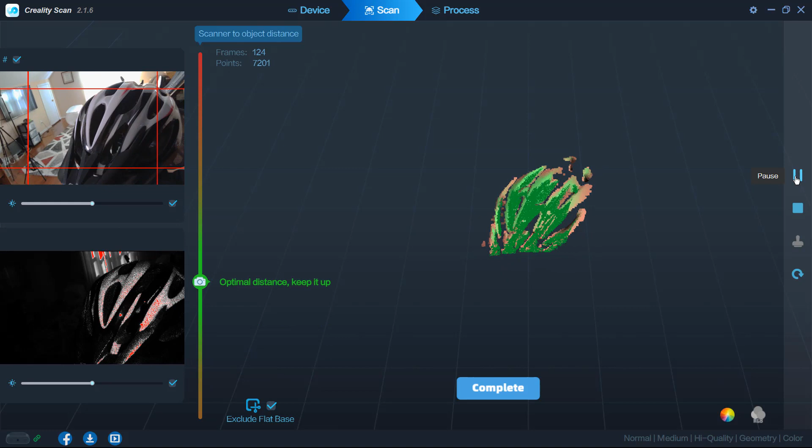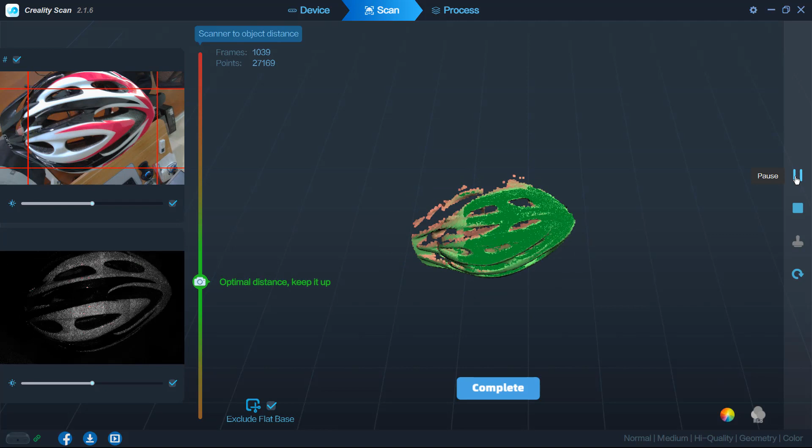There are two different versions of the Creality Scan Ferret: the Scan Ferret and the Pro. To the best of my knowledge, the only difference is the Wi-Fi 6 wireless bridge. I tested the wireless bridge paired to a smartphone. I was not able to get it to work paired to my laptop, and I think in theory the best use case for this is to pair it to your laptop, because that way you can go about scanning without being tethered to a computer.

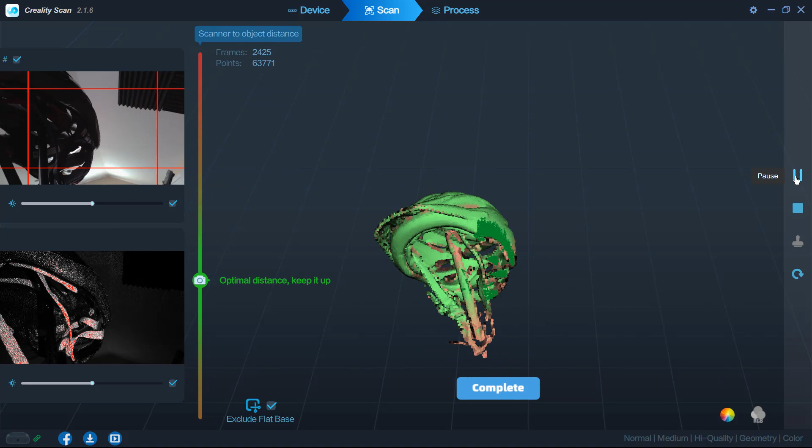Obviously you will have to work within the confines of the battery that comes with it. For this first example, I scanned a bicycle helmet, and I did this in 3 different scans: tethered to my PC, tethered to my laptop, and then using the Wi-Fi bridge to my smartphone. So this was a good test of how the scanner would work in all 3 scenarios.

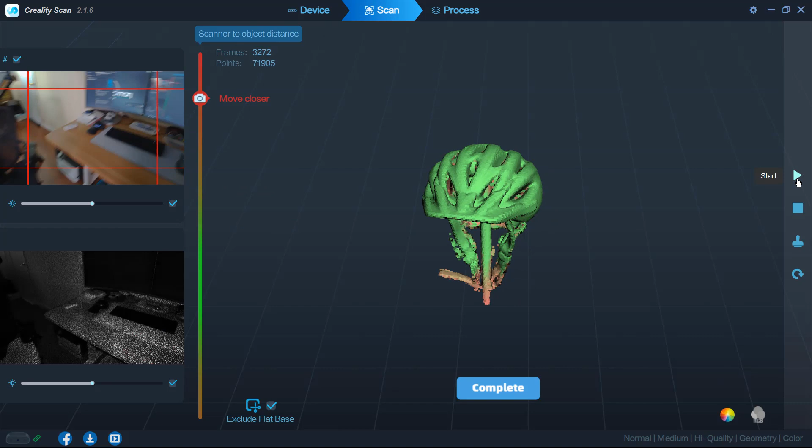The first thing I found is that the amount of time you spend hovering over an object will directly indicate how good the downstream mesh and points are going to be. You need to make sure that everything's a bright green color when you're scanning.

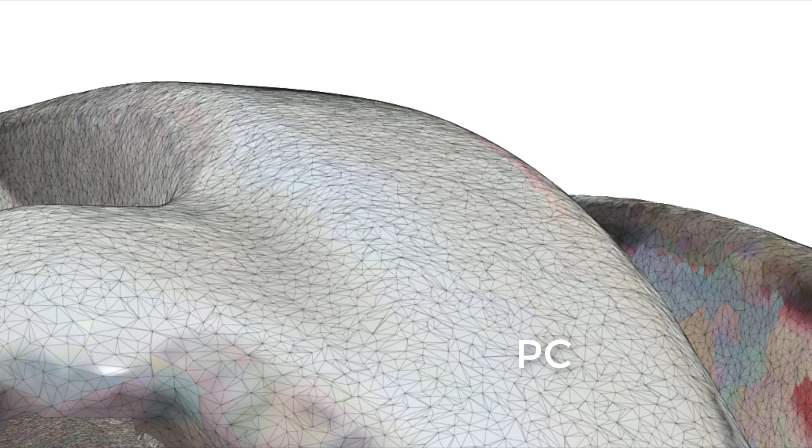I did not really notice a performance difference between the PC and the laptop. I took about 5 minutes to scan in both instances, including the one-click process. With the smartphone, the end result actually is the same, and interestingly enough, I ended up capturing more frames on the phone in the same amount of time. However, the processing time took longer to do on the phone. Again, it was still the one-click process.

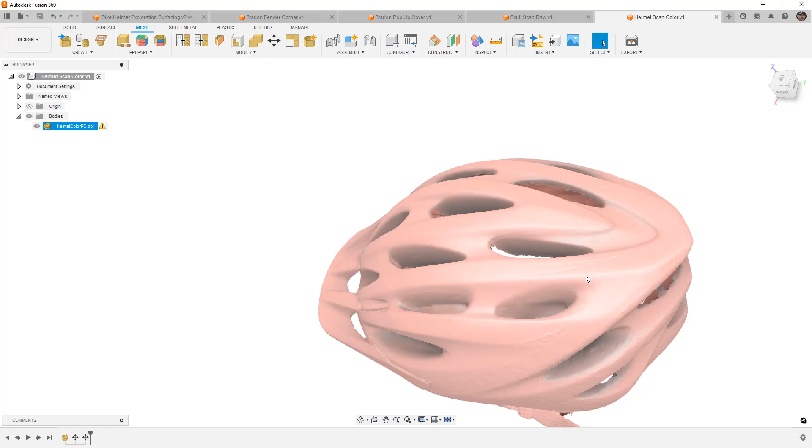I didn't toggle or tweak any of the options or settings. I just used whatever it had as a preset, scanned it with color, and I did notice again it took longer for the optimization and the processing. I'm using a Samsung Galaxy S23, a fairly recent phone, and I did notice it got warm during that process. The scan was fine, but processing it did tax the phone a little bit.

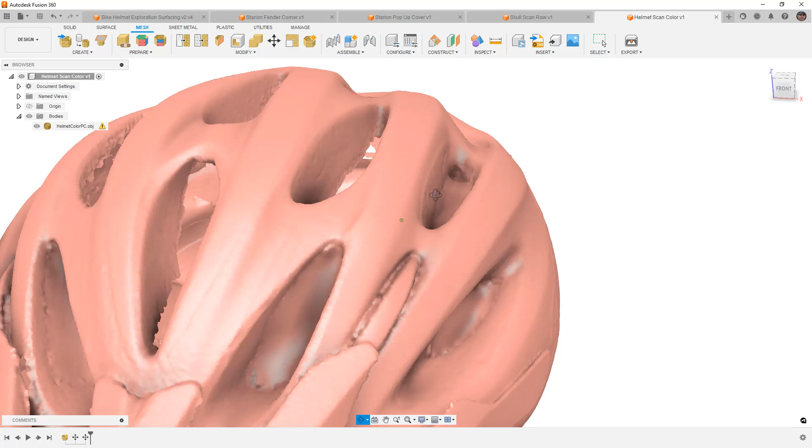I think the benefit here is the wireless bridge. If it can't be tethered to either your PC or your laptop, there's not really a good reason I can see to use it tethered to a smartphone, because you can plug directly into the phone. You're not really gaining anything in terms of performance using that option, to the best of my knowledge.

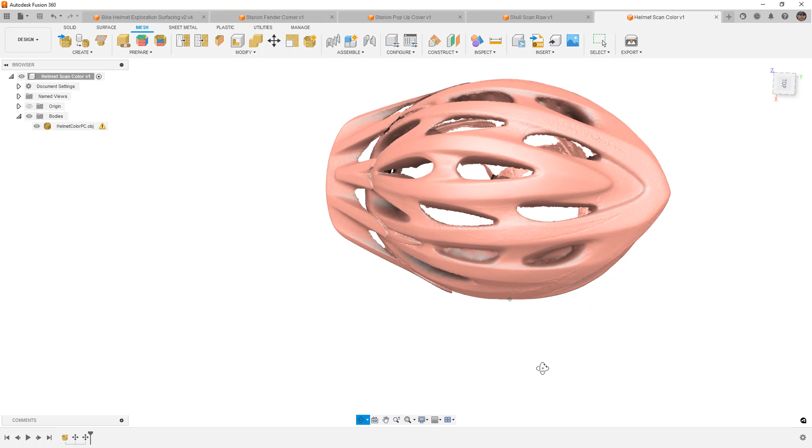What I noticed again is the tracking was fine. Scanning the shiny objects and the black objects, it actually did a really good job, but we can see there is a definite difference in the scan quality on the shiny white and red areas versus the shiny black areas. This does come in full color, so I can export this OBJ and bring it into Fusion 360 with the color, which I thought was a pretty nice addition. A lot of times as you get up in the scale of 3D scanners, the color options are add-ons, so the fact that these entry-level scanners can offer the 24-bit full color is a pretty nice feature.

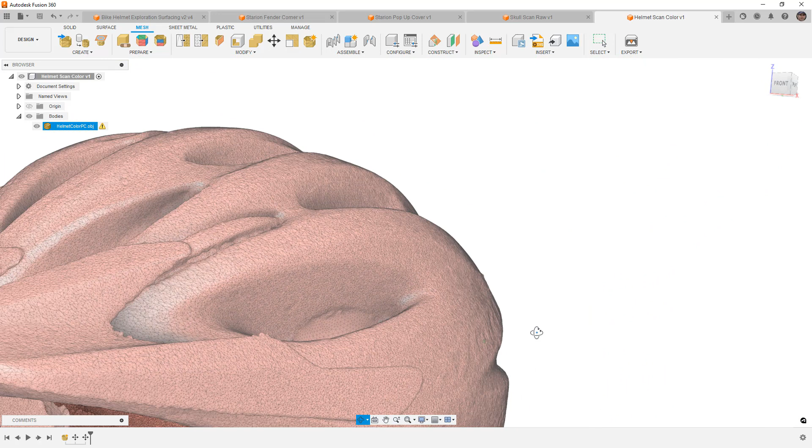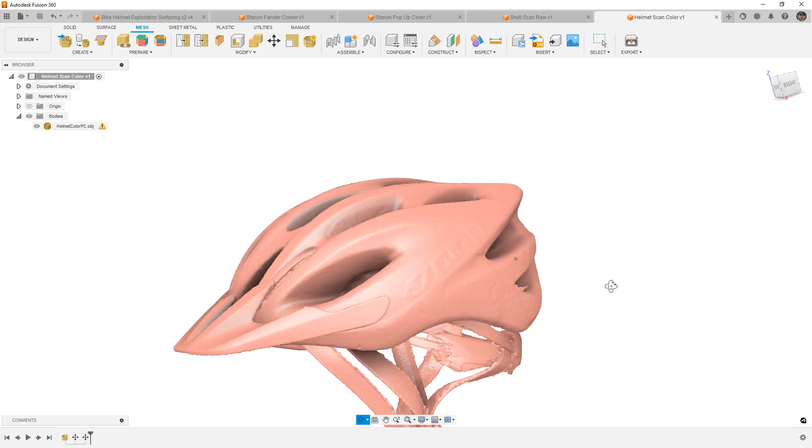When using the scanner, it's very important that the preview on the screen stays that bright green color. When I scanned this with my desktop and with the laptop, both took about 5 minutes to scan as well as process with the one-click option. I didn't go through any of the settings or toggles, I just used everything that Creality ships it with. I think this software and scanner are really meant for an entry-level person, designed to pair with their 3D printers. So if you're scanning something you're planning on 3D printing, I think this is a perfect companion.

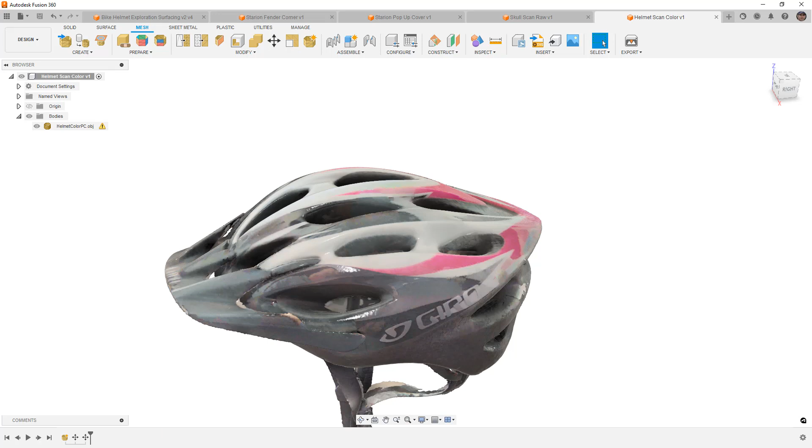Now, the quality of the mesh is better on those shiny white areas than it was on the shiny black areas, but overall I think it did a really good job of scanning the helmet. The next thing we're going to move into is car parts.

Now, this is probably what most of you are interested in on this channel, whether or not we can scan a car with it. First object I did was the pop-up headlight on my car. I used marker tracking, which is a new addition to the Creality Scan software, so keep in mind that it's just been added in the last release.

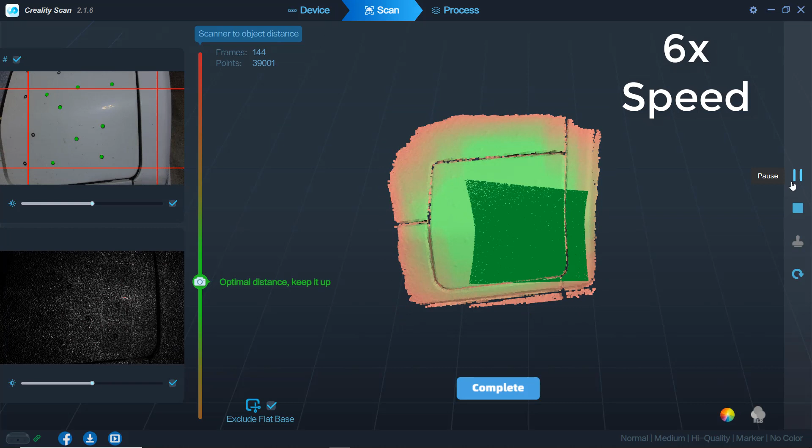What I will say is that this took a bit longer than I expected. This was tethered to a laptop, so I wasn't using a smartphone, and I found that I had to spend a good bit of time in order to get that bright green color on the preview. The areas in the corners where I don't have the bright green, as we begin to process the points in the mesh, start to lose out on that data.

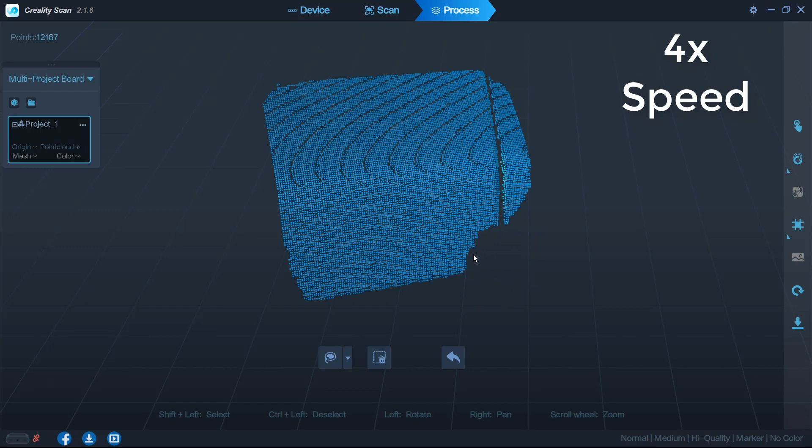So I will say that the output had a bunch of bumps where the markers were, and I didn't see any automated option for removing those. You can go through the process manually. Once you mesh it, you can remove those and patch it, but I actually found that the quality of the patch was a bit better filling those holes in Fusion 360, so I simply exported it with all the bumps.

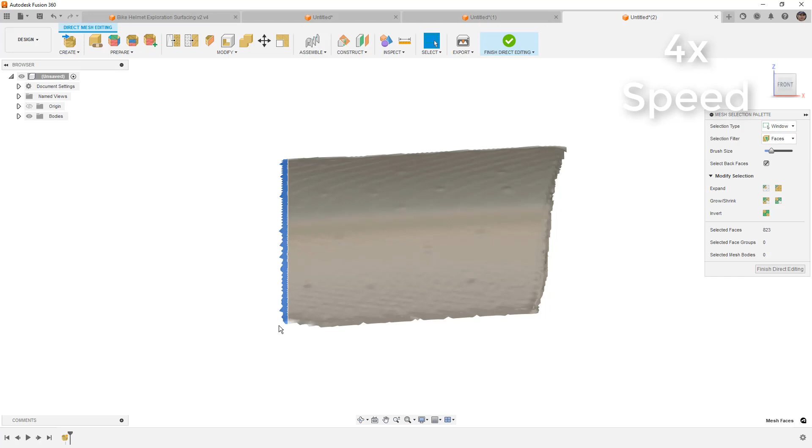When we get to Fusion, I do a little bit of processing by using a remesh and also using the smoothing, and this was able to filter out those points, so I didn't have to worry too much about doing a lot of extra work.

The end result, the quality of the surface - and this was done in high quality mode, which there is also a fast scan mode - but the quality of the surface or the mesh that we got is actually pretty good, but the more we process it, the more we're going to start to lose some detail.

Which brings me to the next example, which was the front corner of the fender, so right near that same area of the pop-up headlight, and this had a bunch of harder edges on it, and I was really curious as to how this would work.

I did this by just using the feature or geometry tracking, no markers, and I did it relatively quickly. I didn't spend a bunch of time making sure that the surfaces were bright green in the preview, and we can see a very drastic difference in the quality of the scan.

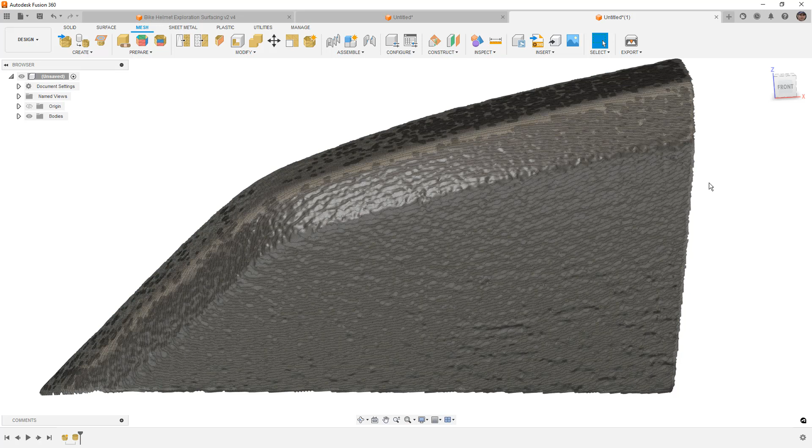Now, I think when I see comments about this, it's not a professional scanner - it's not, it's a consumer entry-level hobby scanner. But there is definitely a difference in quality when you spend more time scanning your objects versus when you just go through it fast.

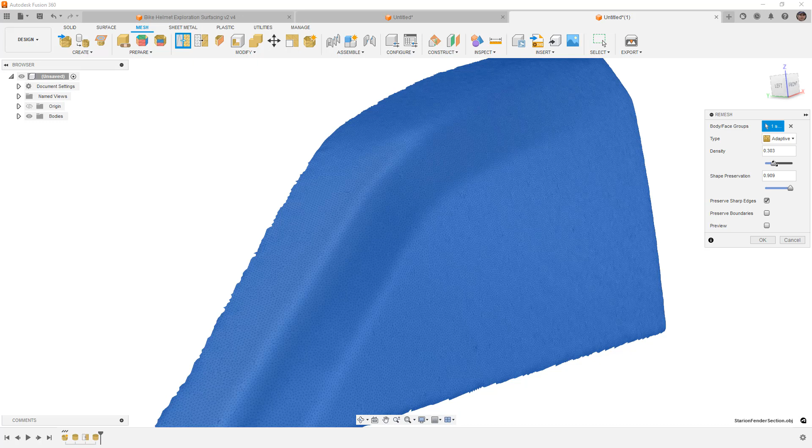Now, even though I went through this fast, I brought it into Fusion and I did some processing, and I was able to get what I think is a usable result. But again, the more you process and smooth, the more details you're going to end up losing, so there are going to be some diminishing returns to how much you can process this.

With something that is maybe a little bit smoother and doesn't have those hard edges, you can maybe get away with a little bit more processing. But with the same corner, if I'd spent more time scanning, I would have gotten a better result.

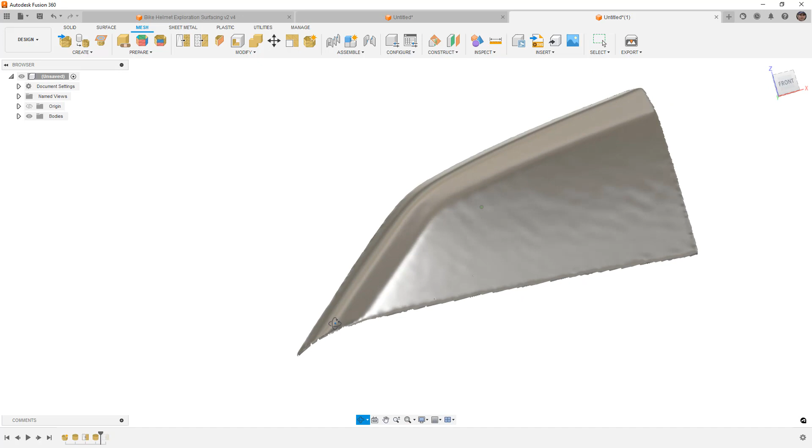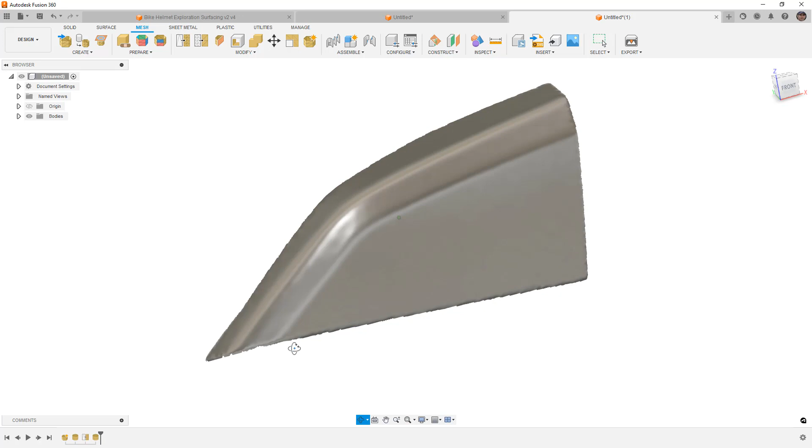So would I scan an entire car with this? I don't think so. I think that if you use the fast scan mode tethered to a laptop, it could be done, but the problem is its cable is fairly short, so you will have to constantly move the laptop around with you. Or if you use a smartphone, then you have a little bit more freedom to move around, but you are going to likely take a hit in the frames per second that you're capturing. So I think that this process to get good data of an entire car would just take way too long.

Is it possible? Yeah, sure. I think that you could do it, but would you want to? Probably not.

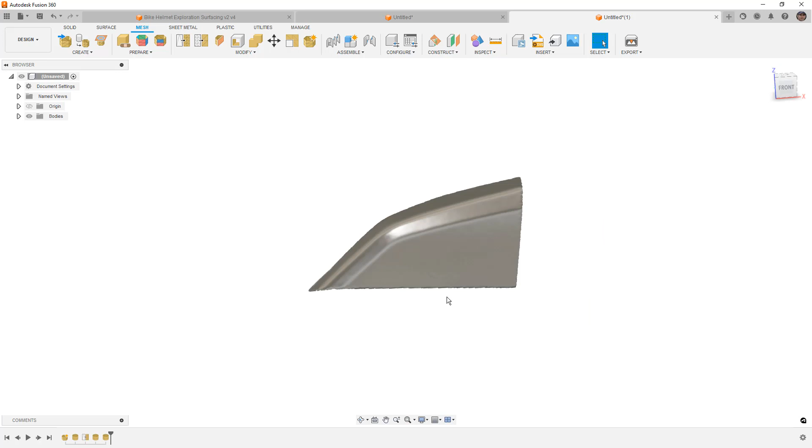Now, when we move into the next example, one of the things that I see on the Creality Store website is scanning an entire motorcycle. Now, I was skeptical as to whether or not this was possible or feasible, so I tried it on one of my bikes - this is an old GPZ 750 project bike that I've had for 20 plus years.

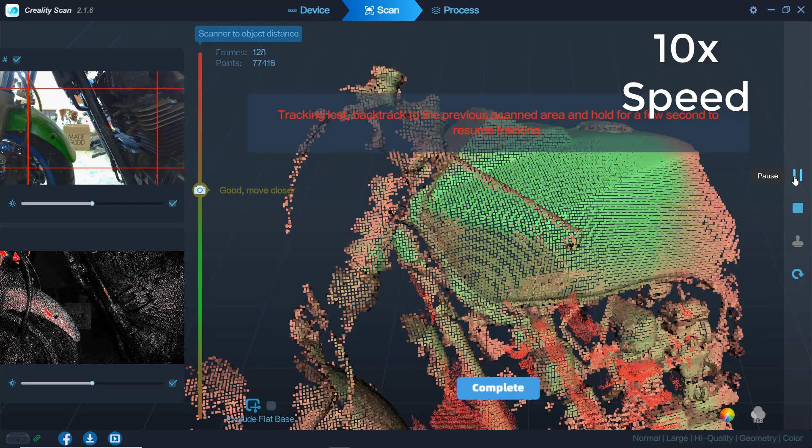Now, I went into it - this is a single scan. I spent the most amount of time on the gas tank. The tail section is raw sheet metal, something that I was building. And then I quickly went over the engine and some other areas, moving out to see where the tires were and the wheels and the swing arm and all that sort of stuff. Now, I will say that the amount of time that I spent scanning the tank, the results are pretty good.

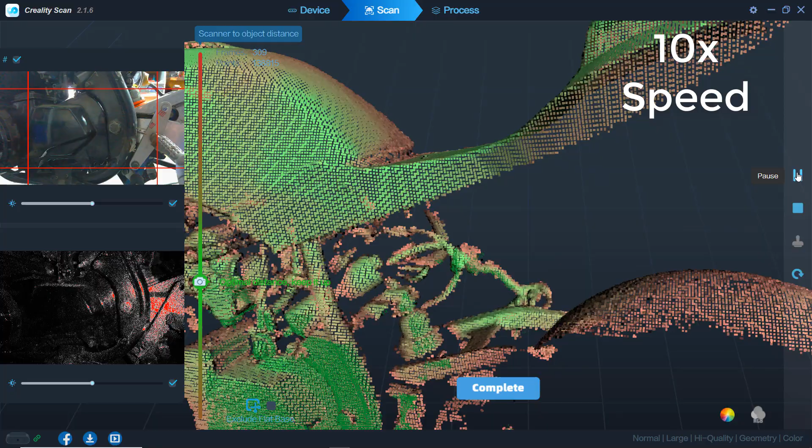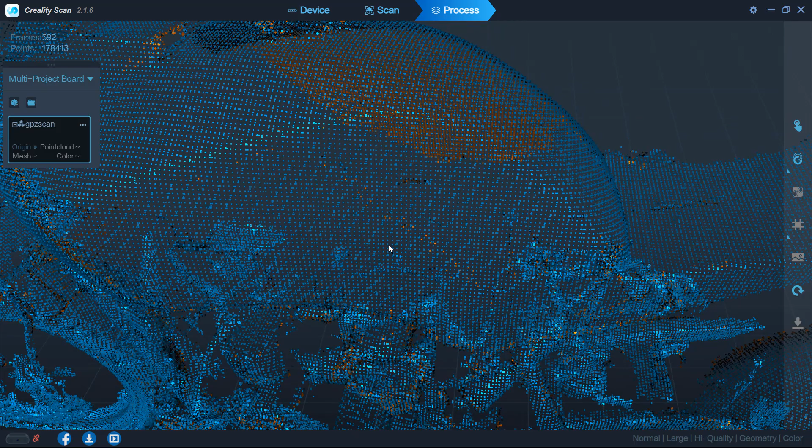I think that I could use that to design some parts off of. However, the rest of it, because I didn't spend the amount of time to hover over all of those fine details, it just ends up being junk in the scan. So as soon as you start optimizing and trying to build a mesh out of this, you'll start to see that those areas get really rough. That's kind of what you have to expect.

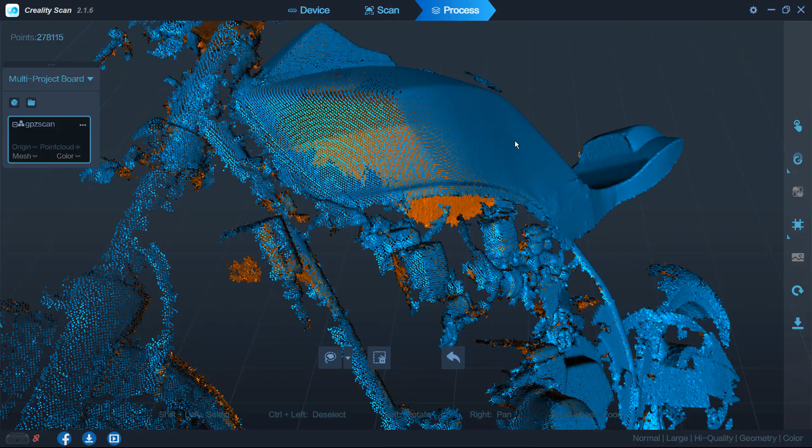The scanner itself can do this, and I think that if you took the time, you would be able to get something usable out of it. But I think that the amount of time it would take to scan an entire motorcycle would just be unrealistic. Not to say that you can't do it again, but I think that it's probably not a realistic ask to be able to do that.

I will say that the tracking did work pretty well, and it was really good at picking up the dark black areas and the shiny areas. That was really surprising to me that it did so well with those areas. So I think that if you really wanted to get a high resolution scan of, say, the engine, if it's shiny black, I think you could do it if you were patient enough and you spent enough time in those areas.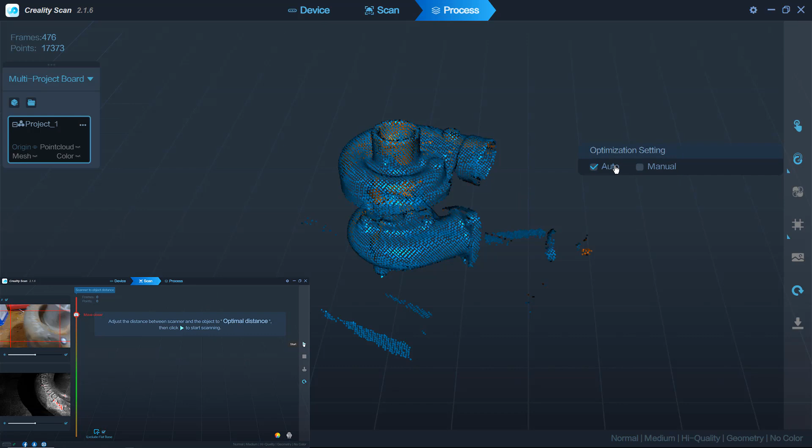Moving on to the next example is a small turbo that's also from this GPZ project. Now, I spent probably the most amount of time scanning this out of anything else that I scanned. I spent a lot of time moving the scanner around, trying to ensure that the compressor housing was that bright green color. And this doesn't have any prep on it. There's a little bit of dirt in some of the areas because this actually came off of a diesel Bobcat.

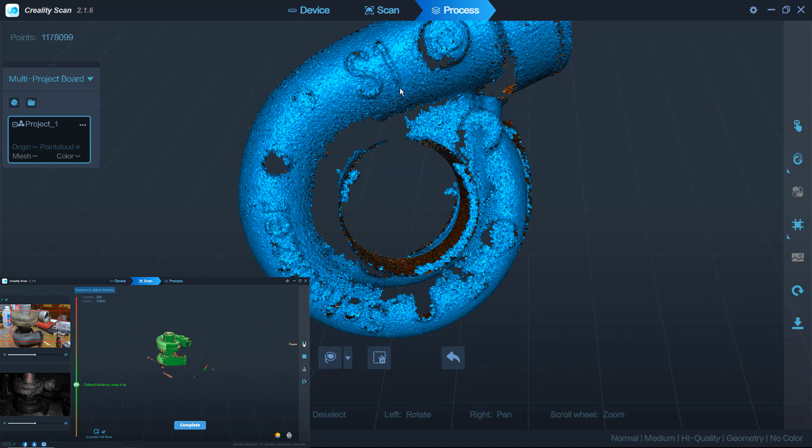But what I found was because of those sort of deep areas where that dirt was, they really didn't scan that data very well. And I won't say very well because I didn't spend the amount of time to get those areas green. Now, what I found was as I was scanning it, it just wasn't bringing that data back. I think with some more prep work, potentially some scan spray, it would do a better job.

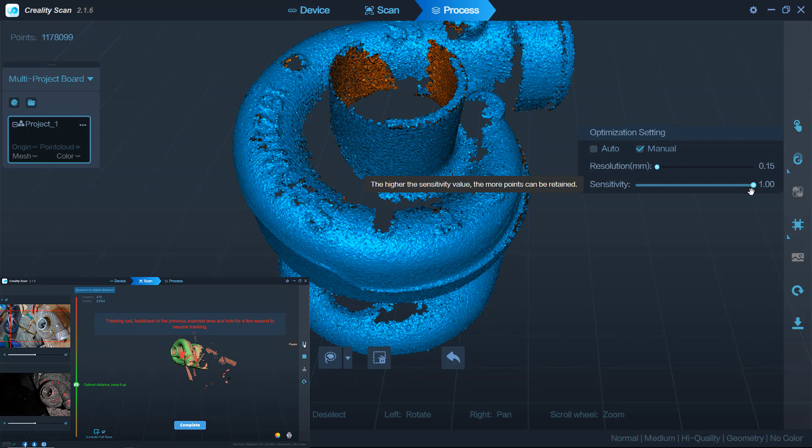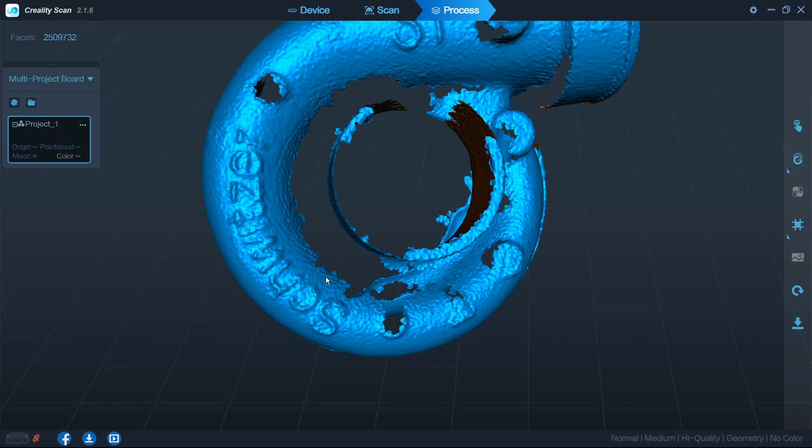But I think that I could get a usable scan out of this in probably 30 minutes, something that I could position in 3D relative to the scan of the motorcycle to help me design things like a header. But I'm not going to be using that to actually design the flanges for the head of the motorcycle or the flanges for the turbo. I just don't think that the data was accurate enough for that. Could you spend the time and get that? Probably. But again, realistically, we have to look at how much time we have to spend scanning.

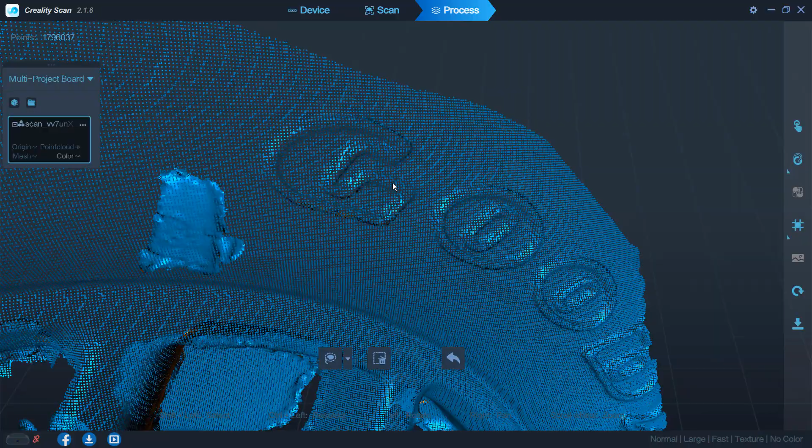So the next thing when we're talking about scanning that I moved on to was I was really curious to see how well it did outdoors. So I took it outside and I scanned the rim on my truck. I was surprised at how well this worked. I only spent probably a minute or 2 minutes doing this. Again, I was still tethered to a laptop. And what I noticed is that it did a great job at bringing out the letters on the tires. And it did a really good job on picking up the shiny silver areas.

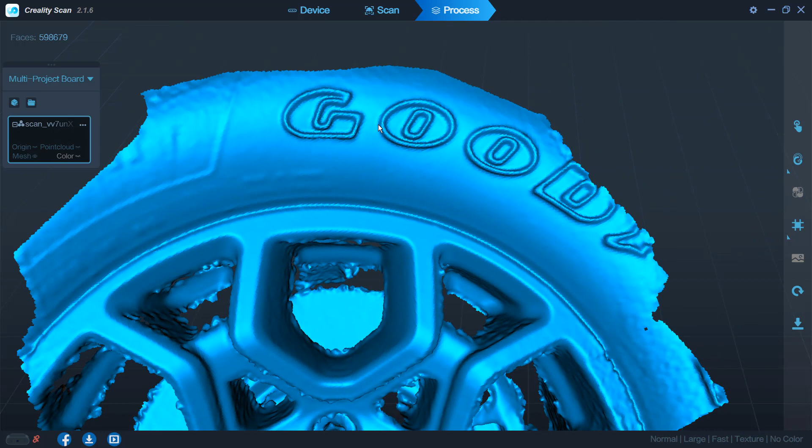So the rims are a dark gray powder coat. And then there are areas that are machined and it's all clear coated. So everything's shiny. Some areas are darker than others. And what I found was the amount of time, again, that you spend making sure that everything you're interested in is that bright green is really the key to using this scanner.

The areas where I thought it was good enough in the corners or creases between some of the features, once I got it back to the computer to process, I found out that I just didn't have enough data there. So it really pays dividends to spend the amount of time at the start to be able to actually capture all that data.

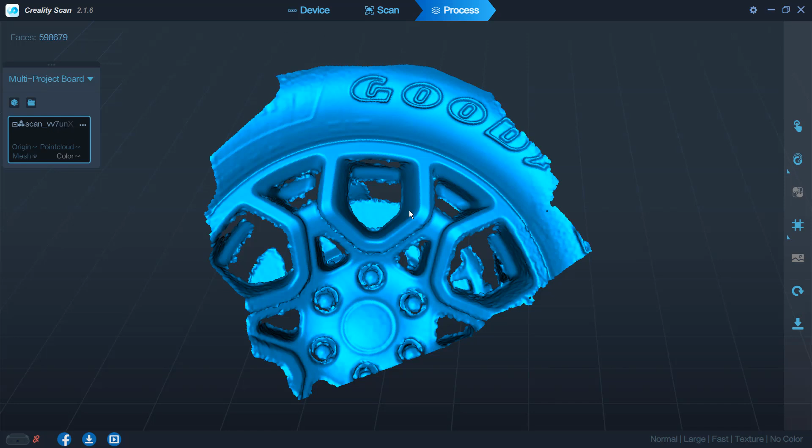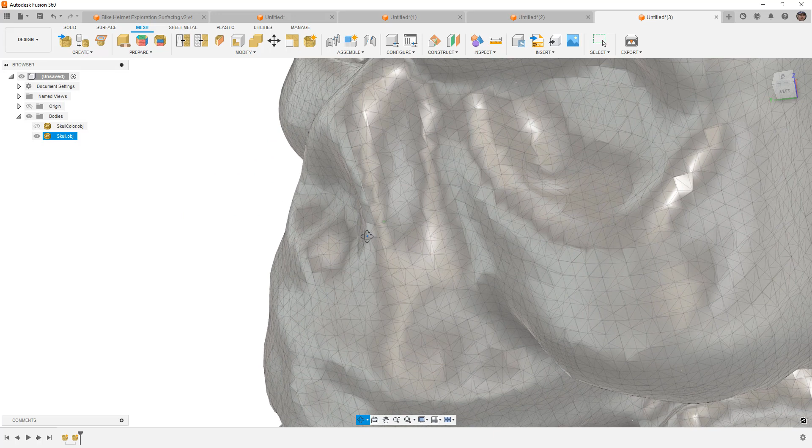The next thing that I looked at was just a little Halloween decoration. This is about an inch tall, and I just put it on a turntable, which doesn't come with the scanner, and I just let it scan. I just wanted to see what it would do, and I think that this is probably where the scanner is meant to be. Now, I think it does a great job if you are, say, building small objects or sculptures and you want to digitize them and 3D print them. I think that's really where the scanner was designed to be.

Can you scan a car with it? Sure. Can you scan a motorcycle with it? Yes. Can you scan small detailed objects with it?

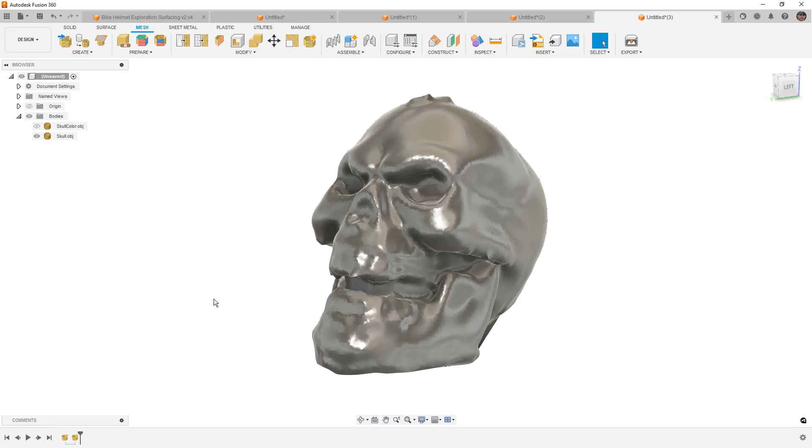Yeah. If we look at the turbo, we could read the castings, we could read the letters on the castings, and we could pull out the detail on the tire of the truck. All that was really impressive. But again, you're going to have to spend a good bit of time capturing that data to ensure that it's good. And you're likely going to spend some time processing the data outside of the Creality Scan software.

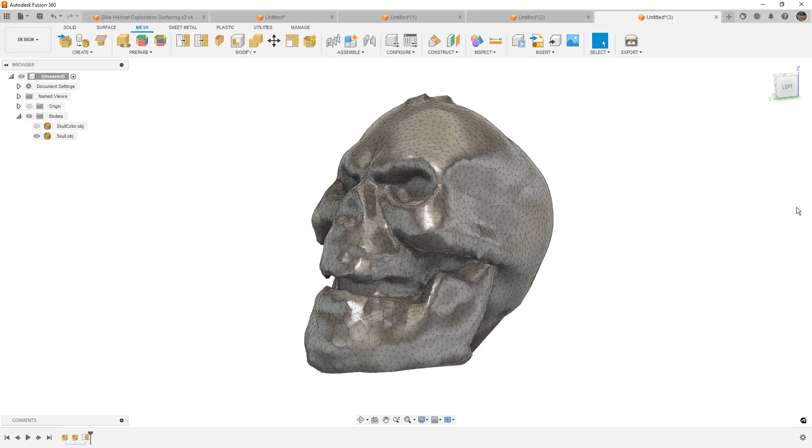All right, so now we've taken a look at a couple of examples. We've seen how it works in various instances. I think we need to talk about where this fits in the overall spectrum of 3D scanning. Now, remember that we've got two versions, the CR Scan Ferret and the Pro. And again, I believe the Pro is going to come with the Wi-Fi 6 wireless bridge where the traditional Scan Ferret does not, but I think structurally speaking, both scanners are identical.

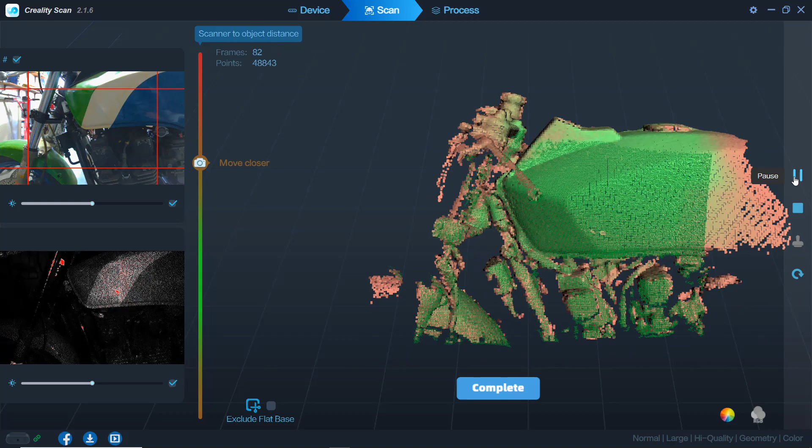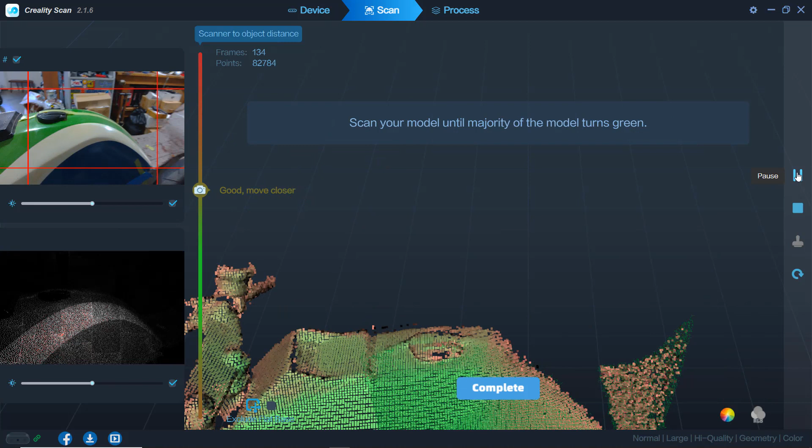Now, in terms of what I think that the scanner can do or should do, it's really intended for an entry-level person to scan objects that they want to 3D print. Now, it claims that the smallest object is 50 millimeter cube, and it goes up to larger objects, obviously things like cars and fenders and motorcycle parts and things like that. Now, hopefully with the examples you've seen, you understand a little bit about how it works and the quality of the scans that you can get with it.

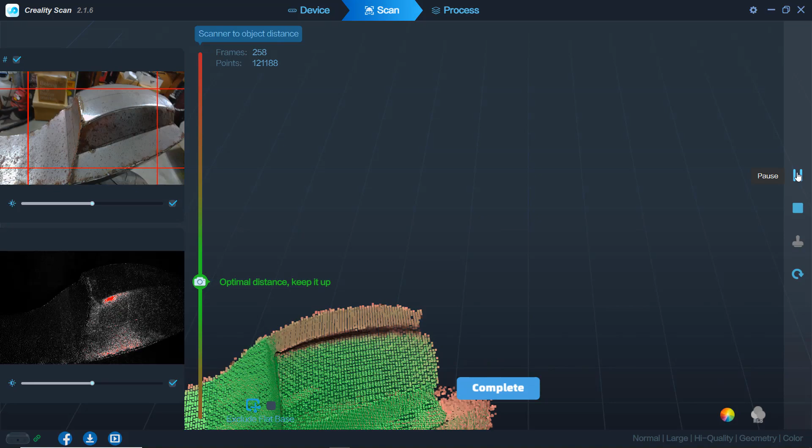But in terms of what I think that the scanner can do or where it sort of fits into the ecosystem or the spectrum of 3D scanning, I think for objects like the handmade motorcycle tail section, that was bare sheet metal, it did a really great job of scanning that. Obviously, I'm not looking at a perfect replica of a hand beaten sheet metal tail part, but I could use that to digitize it and then begin designing my parts around it. So I think it's a great use case for that.

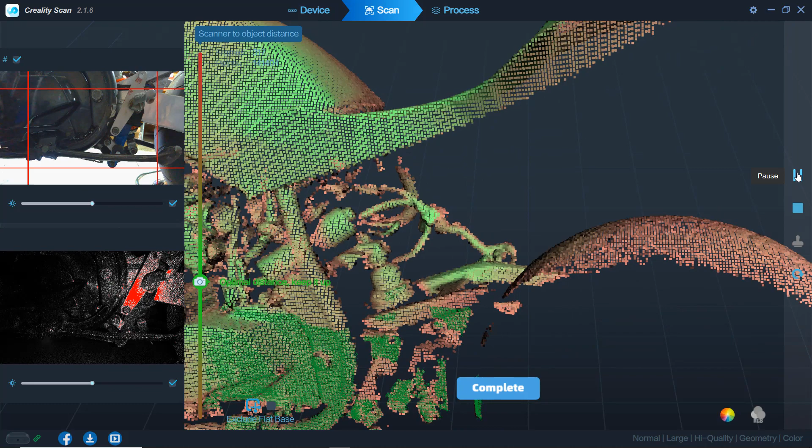If you're using it with the wireless bridge or with your smartphone, you've got a little bit more mobility to where you can move around and scan objects easily without being tethered to a computer. So again, there's a bonus there. If you're going to be doing hand sculptures, if you're trying to make a custom piece out of clay and you want to get that sort of rough clay model into the computer as a basis for your design, again, I think it's a perfect use case for that.

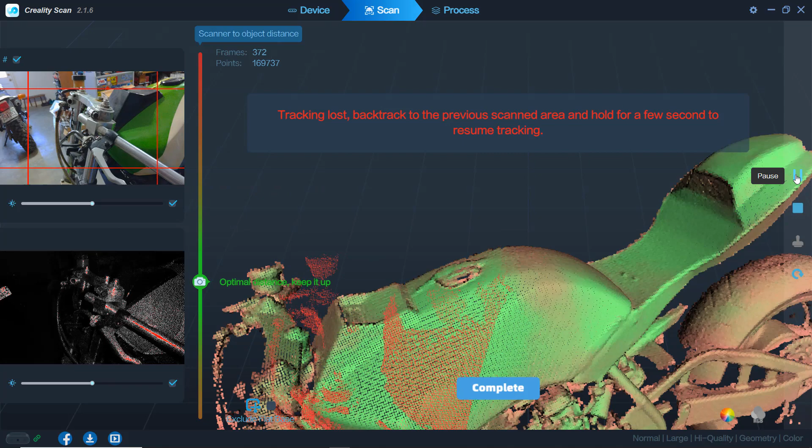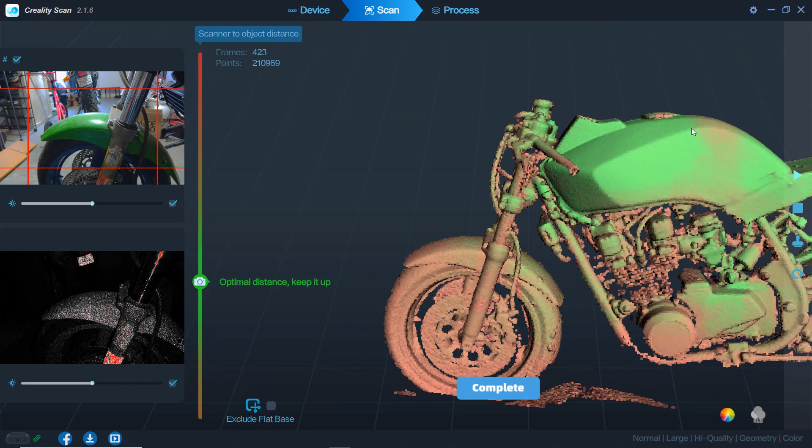Now, the first example that we looked at with the helmet, I think it actually did a really good job with that as well. Obviously, helmets are tricky because there are a lot of open sections and pockets and things you have to scan into. And because of the different textures and colors, it also puts it through its paces to figure out how well it does scanning things like shiny black areas and into those crevices and corners. But overall, I was pretty impressed with the 3 scans I did of the helmet with the PC, the laptop, and tethered to the smartphone.

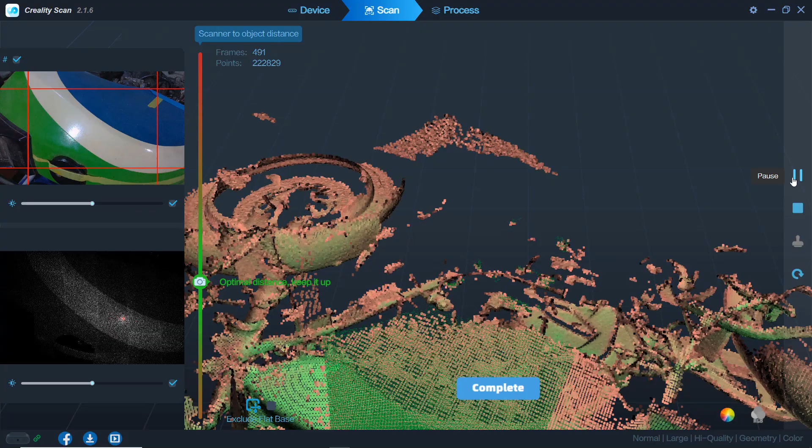So, where I think that you should really consider the scanner that you're buying is surrounding the ecosystem that you work within. And what I mean by that is the CR Scan Ferret and the Scan Ferret Pro are really marketed as an entry level, affordable consumer 3D scanner. And I think that it certainly fits in that category. And what you're going to notice as you begin to spend more money on 3D scanners is that the software that's paired with it oftentimes gives you a lot more options, in terms of setting up the scan, but also in terms of processing the points and processing the mesh.

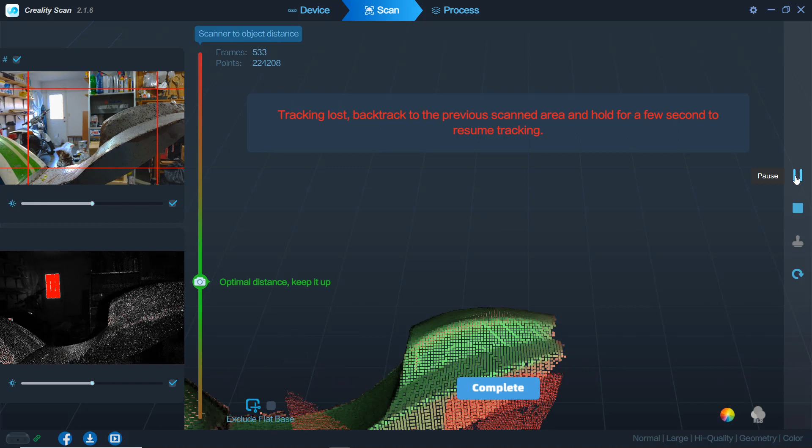With the Creality software, and in this case we're using Creality Scan, you have a couple of sliders and sort of one-click options to optimize the points and to optimize the mesh. Now, if you need to go past that, then you need to move into another piece of software, something free like MeshLab or move into Fusion 360 like we did in these examples.

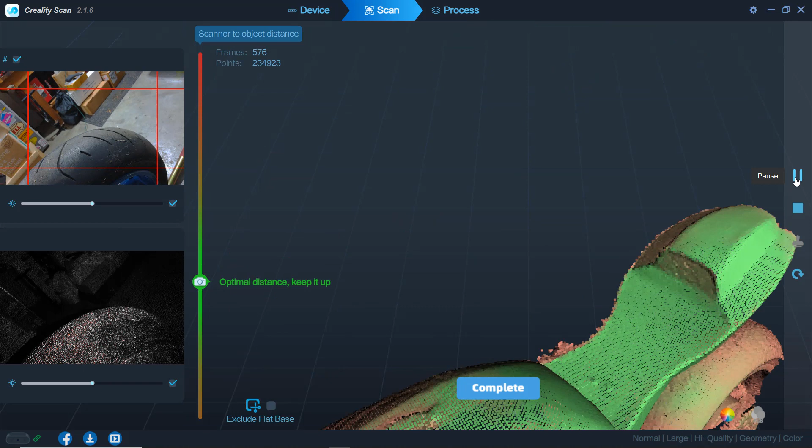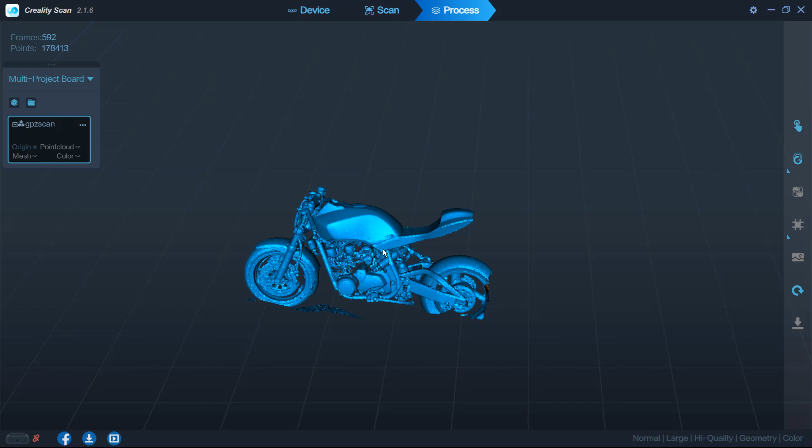Now, that doesn't necessarily mean that it's a big detractor, but it's something that you should consider. If you are trying to compare the scanner to something in the couple $1,000 range or up from there, $30,000, $50,000 range, you are going to see a drastic difference in the available options that you have on the software side as well as on the hardware side for the scanners. So it's not realistic to try to compare all 3D scanners to each other. You have to look at what you have available, you have to look at the price range, and ultimately what kinds of things you're trying to 3D scan.

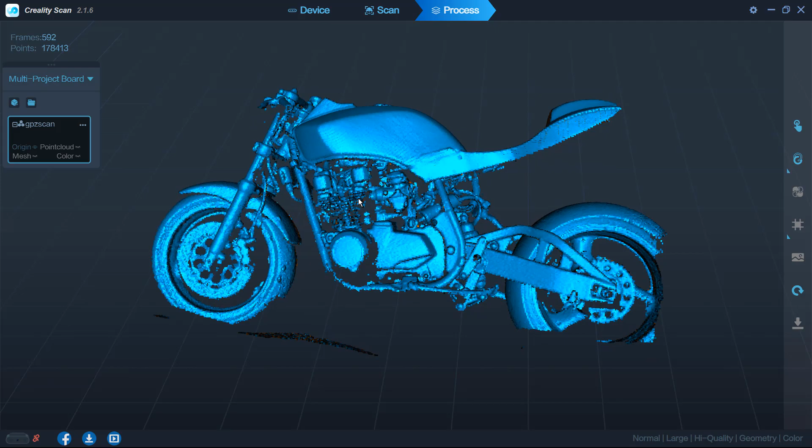Now, the big thing that we talk about on this channel is sort of cars or automotive parts, not really out of necessity, it's just kind of what the channel has evolved into. Now, I don't necessarily think that this is the best scanner for the job. If your intent is to scan car bodies and car parts and reverse engineer things or design parts off of that, I don't know that this is the best scanner for you. It's just not really made for that type of work.

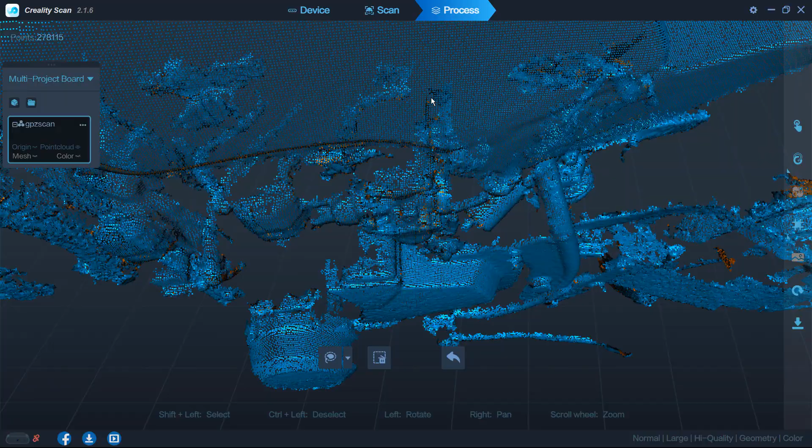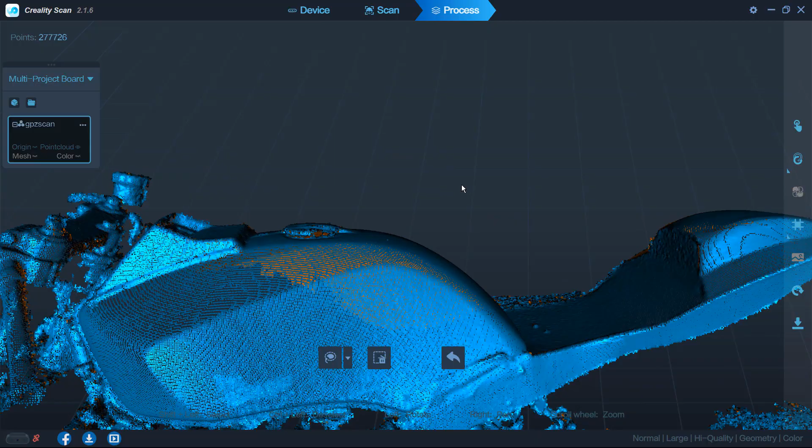In reality, if that's the thing that you're looking to do, you really need to get in and spend a good bit of money for a dedicated laser scanner, something that is ideal for that application. And the entry level for those, really you're talking about $15,000 plus to get into a laser scanner or even a higher end structured light scanner. So again, could it be done? Yes. You could spend the time and you could scan your car and you could likely get usable results out of that with some additional processing. But it's really not made for that. It's not made to scan large objects like that. And it's just going to take a good bit of time.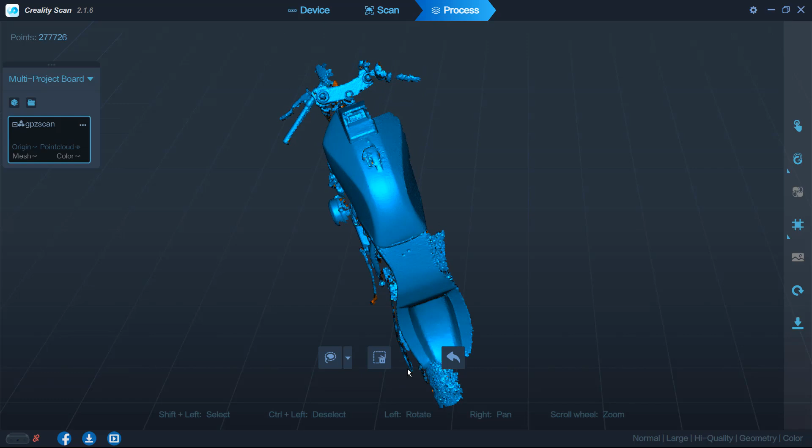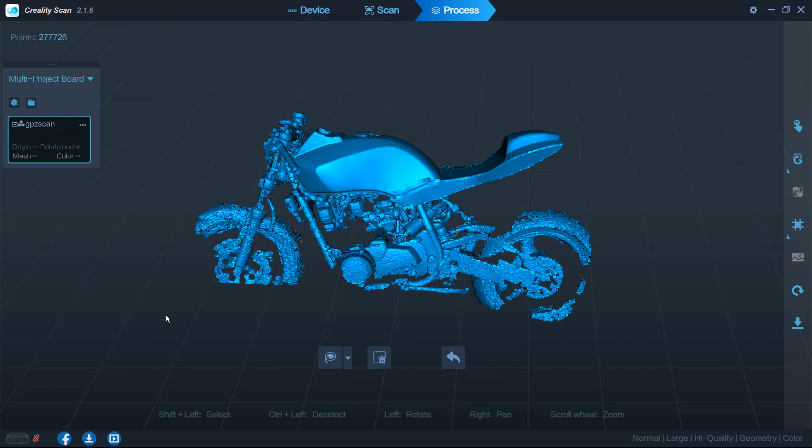Now, our turbo took about 15 minutes, you saw the results. The pop-up headlight cover took about 10 minutes, and you could see the results there. That's 10 minutes of scanning plus a little bit of processing time. If you think about scanning an entire fender or an entire car for that matter, it's going to take a good bit of time to get anything usable out of that. So just keep that in mind that as you begin to spend more money, you are looking at more application specific scanners.

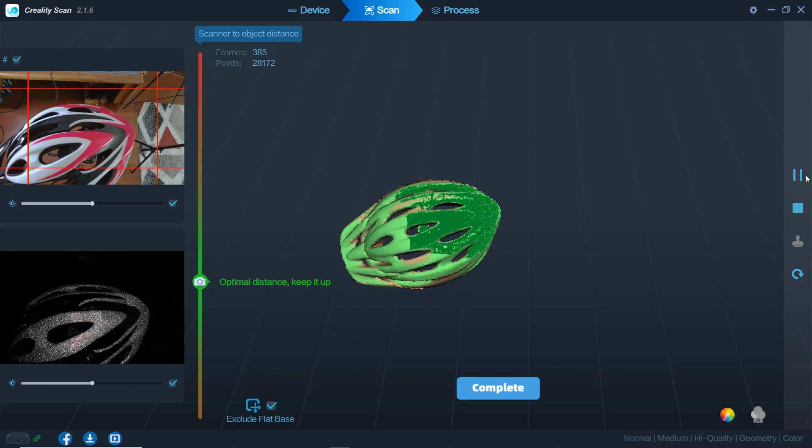Now, I will say that these entry level scanners like the CR Scan Ferret pack a lot of options into a single unit. For example, the RGB camera. A lot of times as you get higher up into the scanners and you look at more specific scanners, things like a laser scanner for scanning car bodies, you won't have any color or texture options with those because they're really dedicated at high precision, high accuracy, and capturing those shiny objects. The Scan Ferret scanned outside really well. When we did the rim just really quickly over about 30 seconds or a minute, it was really impressive, the ability to scan in bright, direct sunlight. And that's something, again, a lot of other scanners really struggle with because of the way that they're built.

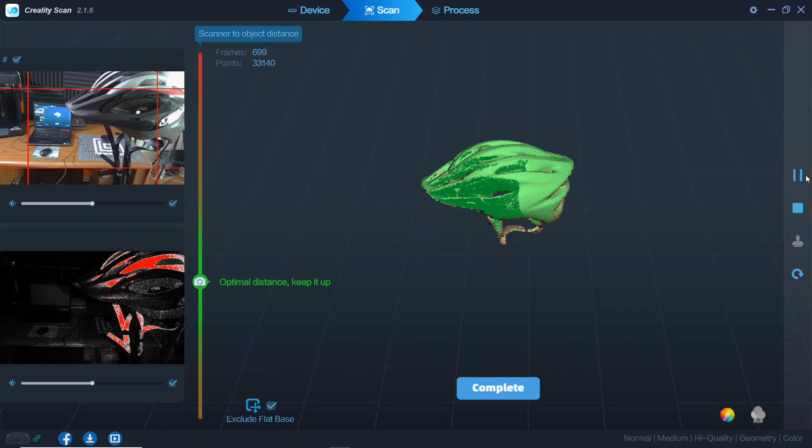I simply want to give you enough information about how the scanner works and a good idea as to what those results look like when you're talking about what the mesh outputs look like. And you can go to the description of the video and download a couple of the samples, the helmet, and the different pieces of the car and the little skull that we looked at. And you can kind of make that decision for yourself.